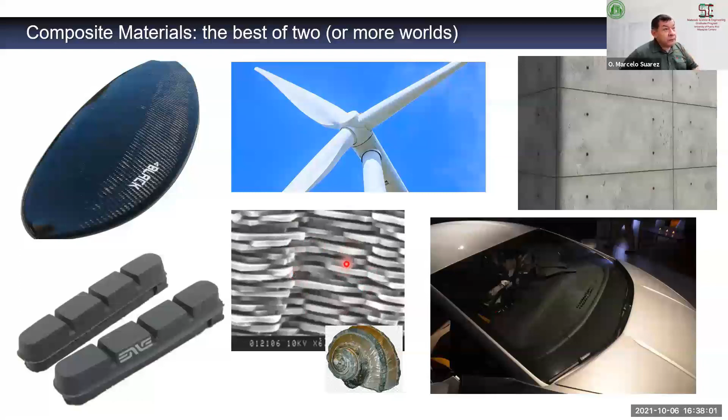My training was in metallurgical engineering, so I'm going to start talking about concrete, then move to what I like the most, which is aluminum-based materials. I don't know if I'll have time to talk about composites we worked on that have a biopolymeric matrix, or a little about these other nanocomposites, which are very interesting materials. Then new aluminum cerium-based alloys, which we worked on in the last 3-4 years, and new and upcoming projects — this is really exciting, something we started working on 2 years ago.

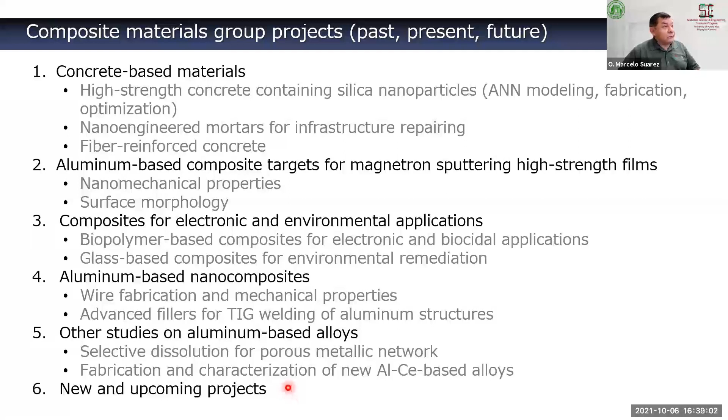So, concrete. Let me just tell you a short anecdote about maybe 8 years ago.

My work was fully devoted to aluminum matrix composites. A Colombian grad student came to my office, knowing I was working in materials research, and he asked me for a project, and also for funding. I told him, sorry, I don't have any funding for you right now, and in terms of projects, all my work is dedicated to metal matrix composites.

But by chance, I was reading something about concrete and how nanotechnology has been used to modify it, and an idea came to mind. I called the student again and told him I don't have funding for you, but I can have funding for materials and access to instrumentation. There's something very interesting occurring these days with nanotechnology, and at that time I was the director of the Nanotechnology Center of the university, funded by NSF.

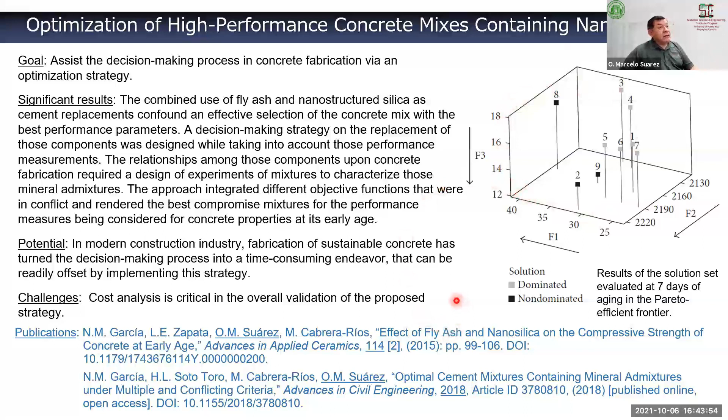That research didn't stop there. We got in contact with a local recycling company, and they asked us if we had any idea how to add value to the waste plastics they were collecting. That was interesting because they were collecting these waste plastics from a local biomedical company, so they could control the size and the composition of the plastics - it wasn't just random plastic pieces. So we started thinking about adding this shredded plastic into concrete, and that opened yet another door, and we started working on that.

Another student produced a paper on that, and nowadays a PhD student, who's not working under my supervision, but I gave her and her two advisors from industrial engineering the idea. They developed it on their own, and they're starting to optimize the mixtures with one additional thing.

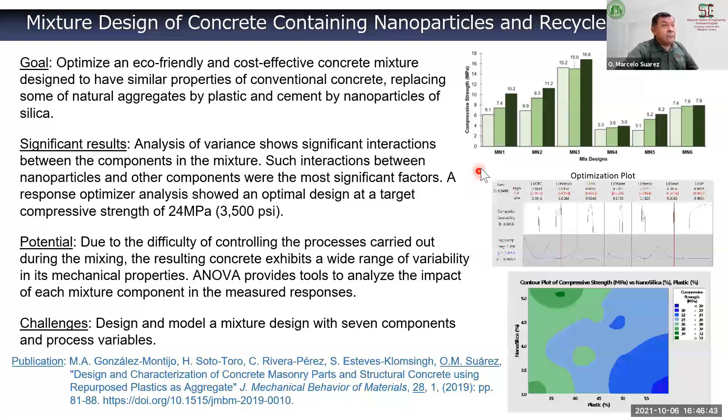They already produced one very interesting paper, and they are developing another one. One other thing that was a side project: we started adding bamboo fibers into concrete, and we found out that the curing time of that concrete was really fast. So we proposed this to the Department of Defense.

The idea is you can put together in very short time an airstrip to produce concrete for airstrips in tropical areas affected by climate change or natural disasters, where you can land heavy equipment, large airplanes, C-130 or whatever airplane you may want to use. We didn't continue the work because we could not produce in high volumes these nice bamboo fibers.

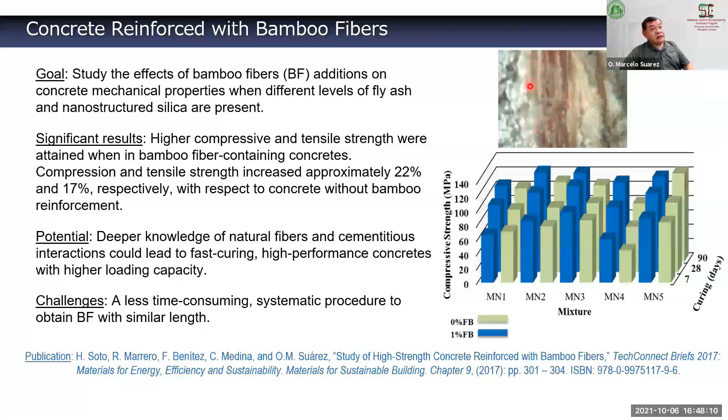We were conditioned by that. It took a long time for one undergrad to produce an adequate amount of fibers from the bamboo source that we have. But the work is there. He's awaiting funding if we get that, and a reliable source of bamboo fibers.

As I said, my lab for materials started with metals, particularly with aluminum. This was something like six or seven years ago.

I was reading about problems in the production of certain MEMS and other devices where they require high reflectivity in a film. In another paper, they mentioned using aluminum films for a number of reasons - the resistance of aluminum to oxidation, and the reflectivity of the material. But they were complaining about the mechanical properties of those films: aluminum was soft, aluminum had a low Young's modulus, and so forth.

So I recalled that I had a lot of work done in aluminum matrix composites, particularly aluminum reinforced with diboride particles - could be MgB2, AlB2, or niobium diboride. We were working with an aluminum matrix composite reinforced with aluminum diboride particles, not nanoparticles, but particles, maybe 10 micron size.

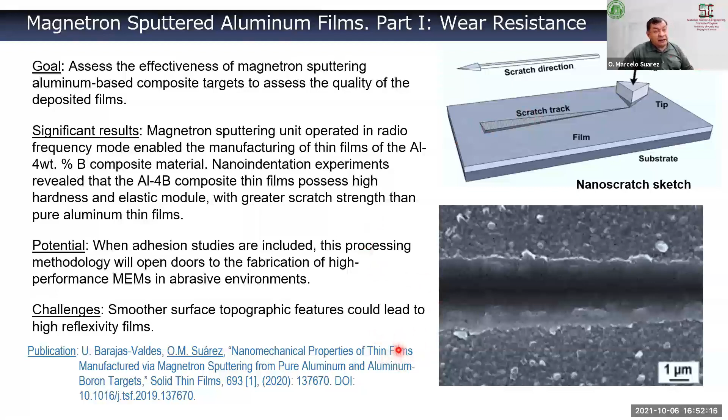After all that analysis, we produced one paper a few years ago, actually last year. And we continued that work, because that was not enough. I said that we were demanding high reflectivity, and that high reflectivity is related to the surface of the material, particularly the roughness. So we did this work using our AFMs that at that time were working.

We found out that a problem with soft aluminum deposited on whatever substrate you want, either glass slides or silicon wafer, is that it had high roughness. One of the reasons is the induced residual stresses caused by the deposition. As a result, you end up with hillock formation on the pure aluminum film.

But on the other side, when we tried our composite film - look at the scales, this is 300 nanometers, this is just 20 nanometers - so it may look rougher, but it's not. Actually, its roughness is really small. So no hillock formation and low roughness.

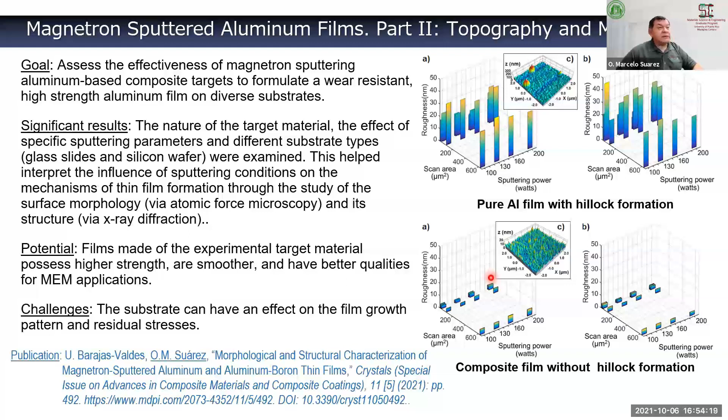We were working with biopolymeric-based composites containing strontium titanate nanoparticles for flexible capacitors. This was an outstanding work by a master's student. She published 3 papers and a book chapter, and now she's working for the Navy in Philadelphia.

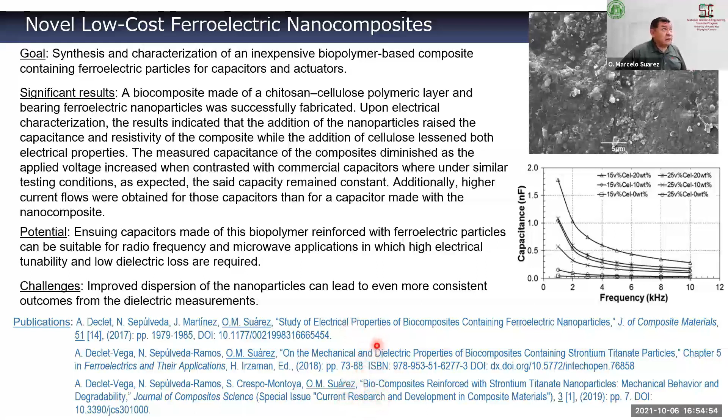I'll skip through this, it's too much. Because we were able to efficiently synthesize these chitosan films, another student started working with chitosan as a substrate for photocatalytic nanoparticles, anatase, one of the polymorphs of titanium dioxide, to control the growth of two types of bacteria, Staphylococcus and E. coli, gram-positive and gram-negative, demonstrating that the composite can be used to control bacterial growth. The student got his master's and now works for Procter & Gamble in Ohio.

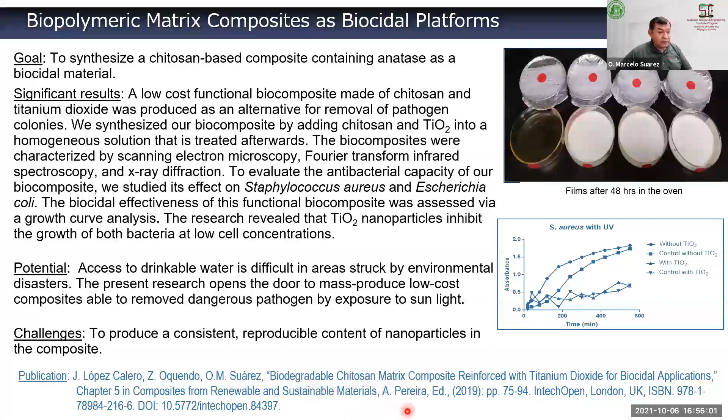We produced a book chapter with those results. Prior to that, another student, now about to graduate with his PhD from the University of Florida, worked on other composites where we used recycled glass as a matrix to deposit TiO2 again, to control emerging contaminants. In this case it was atrazine, a fertilizer heavily used in agriculture and a contaminant of water bodies that has not yet been controlled.

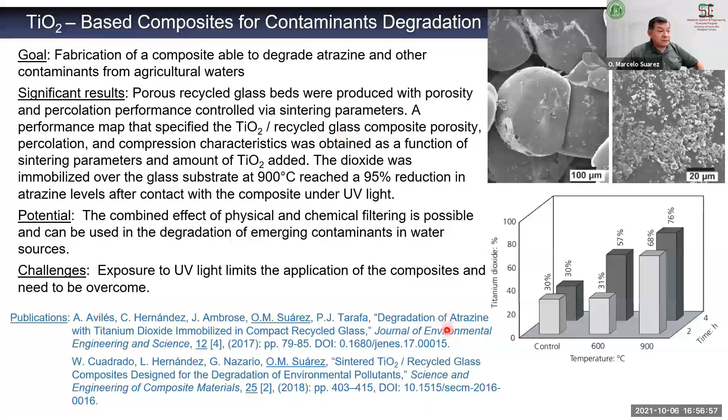The EPA doesn't yet have strong measures against the use of atrazine. We produced 2 papers out of that work. Again, I won't detail that, no time.

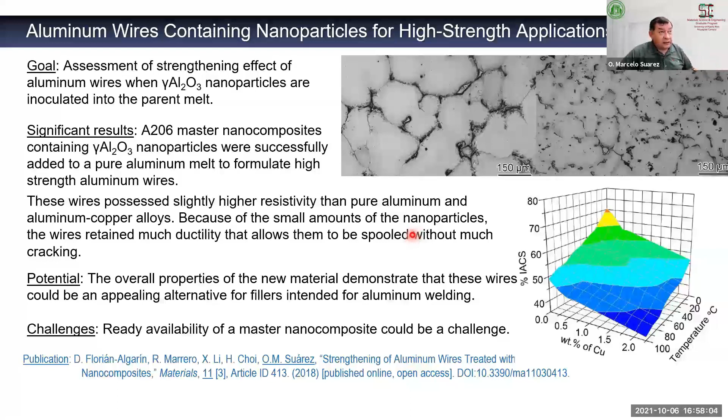Through a collaboration with a professor at UCLA, we worked with nanocomposites containing gamma alumina nanoparticles, and another grad student started producing wires made of these nanocomposites. The final idea was to see if we could use these wires as fillers for TIG welding of aluminum. That's why we measured the conductivity of the wire, because if it has high resistivity, then with the arc of the TIG tip we could increase the temperature of the filler so it would melt really fast.

With the same idea, I was reading at some point about the Portevin-Le Chatelier phenomenon. If you don't know what that is, it's an instability when pulling an aluminum-magnesium alloy, where you end up with a serrated curve in the stress versus strain curve. That's a result of plastic hardening followed by relaxation caused by the precipitation of magnesium nanoprecipitates. So if you're fabricating something made of aluminum-magnesium alloys, you may end up having problems with that fabrication.

So we thought, we have these nanoparticles, we know how to fabricate them. What if we add the nanoparticles to that aluminum-magnesium alloy to prevent, or at least reduce, the Portevin-Le Chatelier problem? And in effect, this doctoral student was able to do that. We published 2 papers with him. He graduated last year, got his doctoral degree in civil engineering, believe it or not.

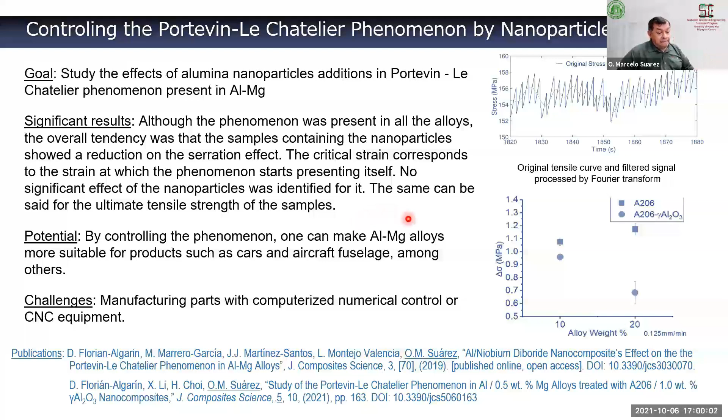Since we were interested in fillers for aluminum TIG welding, another student, an industrial engineering master's student, started working on optimization of the fillers. He came up with a strategy to do that, and we compared the filler with what is being used nowadays when welding two pieces of 6061 base material, a commercial alloy, against 5356, an aluminum-magnesium based alloy, if you're familiar with aluminum designations.

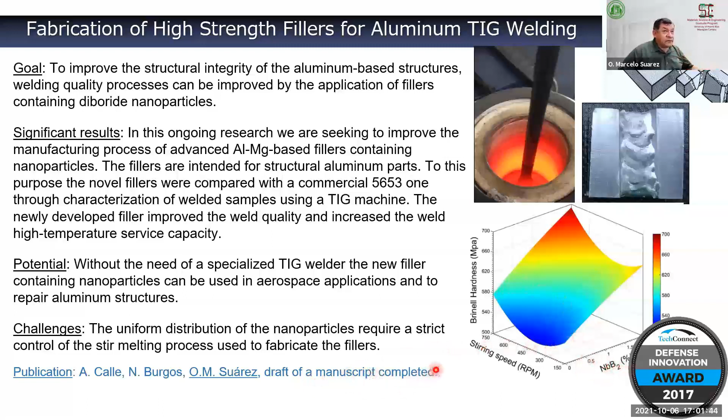This work was presented at a Department of Defense conference, and we got an innovation award in 2017. To put this into context, this student went to present this in Tampa less than three weeks after Hurricane Maria hit us. That was really amazing, a high achievement for this grad student. We're in the process of completing a manuscript based on this work.

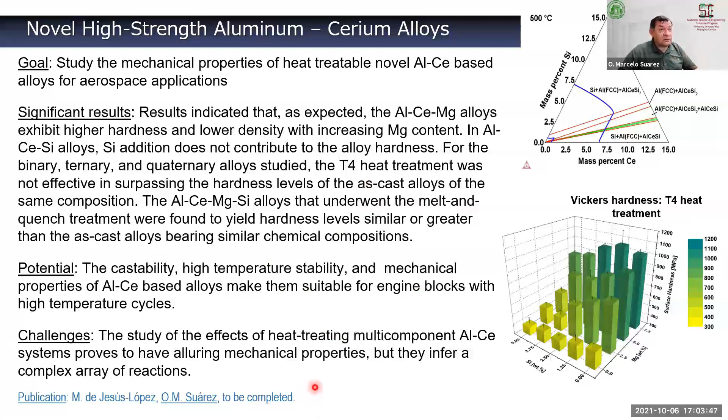Another grad student started working on another approach to produce aluminum cerium alloys. Rather than having aluminum cerium alloys, she thought, okay, why don't we consume more cerium just by putting aluminum and cerium together and press them into a composite. So that's what she did, and the procedure is quite similar to what is used to produce superconductors: just encase that in a stainless steel sheath, and then press that together.

So she was working on that with us, and then she went to work on that at Oak Ridge National Lab, and now she's a doctoral student at University of Tennessee Knoxville. She completed that work over there, and we just published this just 2 weeks ago, I believe.

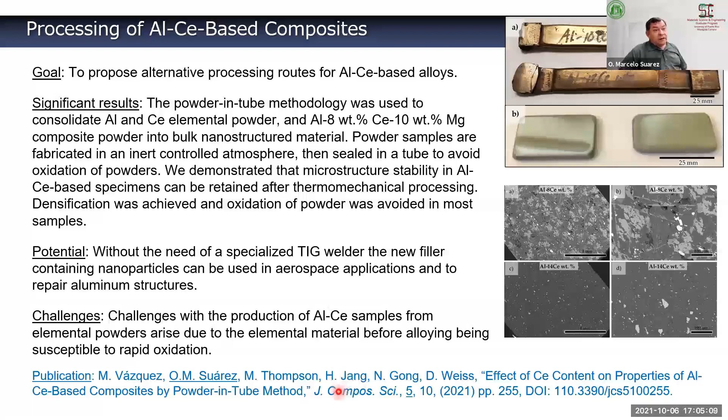I'm not going to talk about these porous materials. That's another way of producing them. We intended to produce nanoporous materials by selective dissolution of some binary alloys.

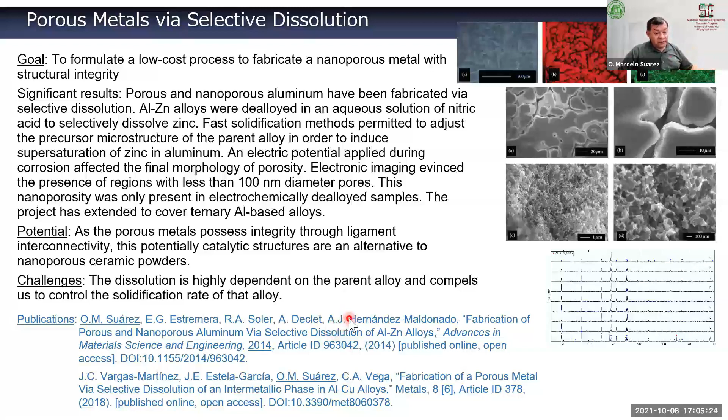Let me go to what I really like. I told you that I would dedicate some time to one of our last projects. This started maybe 2-3 years ago. Let me give you a little context.

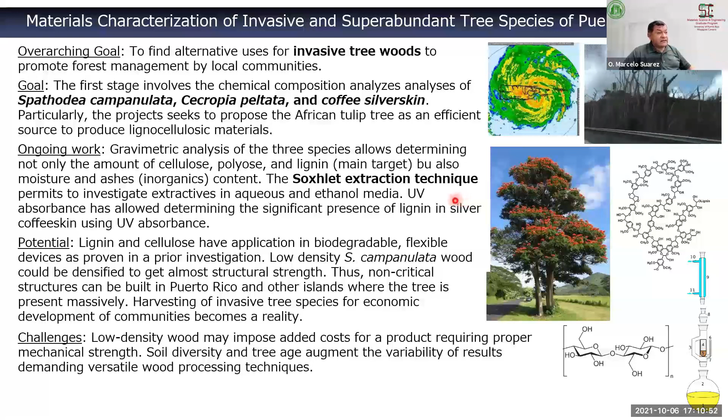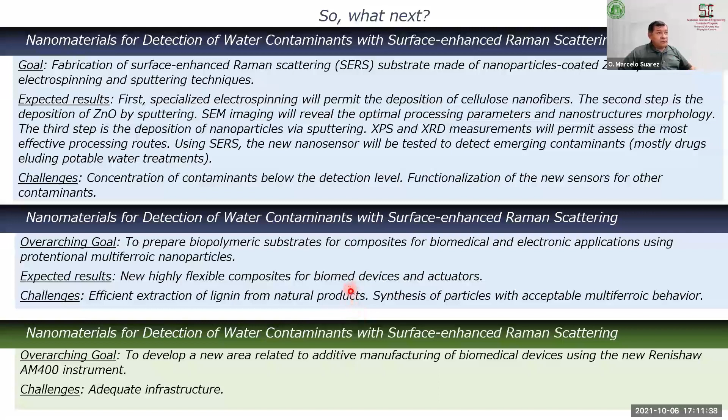We also have some ongoing projects. We just got a postdoc working on new types of substrates for surface enhanced Raman scattering, and another group is working on detection of water contaminants using materials, supported by NASA. We just started these projects this semester, so I can give very few details about them.

The group right now is made up of one postdoc, four doctoral students, and eight master's students, mostly from our materials science program, but some from physics and civil engineering, and very few undergraduates unfortunately. In the past I used to have between 20 and 30 undergrads in the lab, but because of the pandemic we couldn't get more undergrads in the group. Graduate programs include materials science and engineering, civil, and bioengineering, while undergrads come from chemical and mechanical engineering.

We have five labs, including a class 100 clean room. Major instrumentation includes the nano indenter I already mentioned and the class 100 clean room. We also have a Renishaw AM400 that we have not installed yet, as we're trying to convince our administrators to put down money for that. Good luck with that.

Funding sources are mostly NSF, but also DOD and the Department of Education.

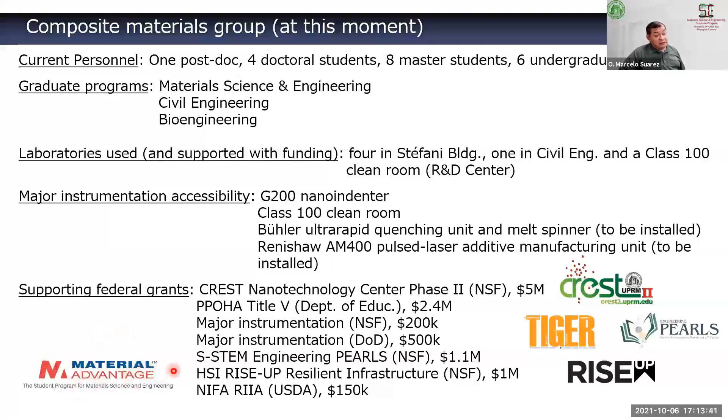About two years ago, we took our show to Vieques Island. If you come to Puerto Rico you have to visit these two small islands on the east coast, Vieques and Culebra, which have gorgeous beaches. The inhabitants are mostly low-income families, which is really unfortunate.